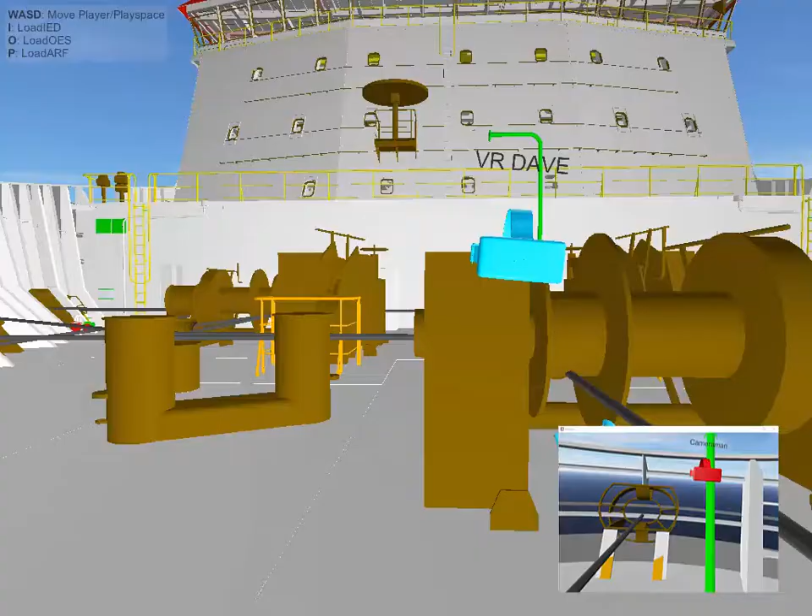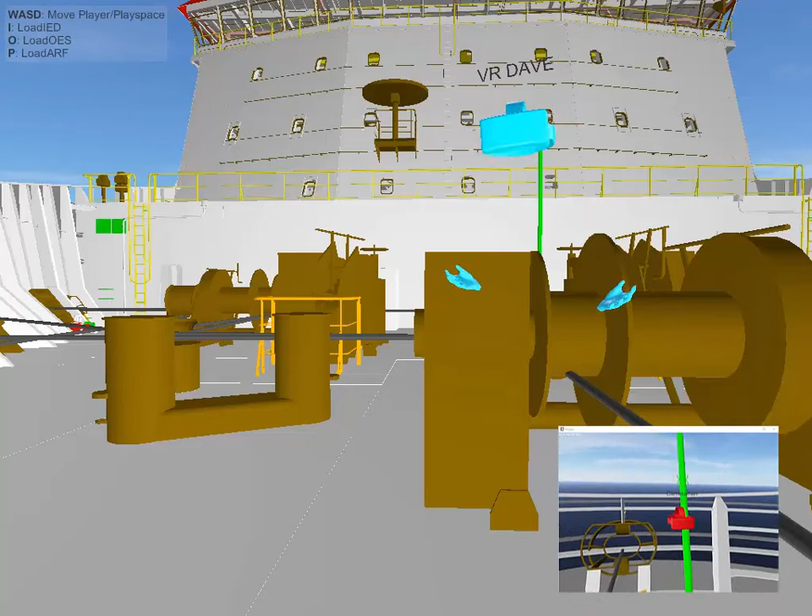In the next few minutes, I'd like to give a short demonstration of our VR application. So, as you can see, I'm here on the Marine Training Project. This is the full model, originally from Tribon in AVEVA Marine, and now in VR. So for the first time, I'm able to be on this amazing vessel and have a look at it like I've never been able to do before.

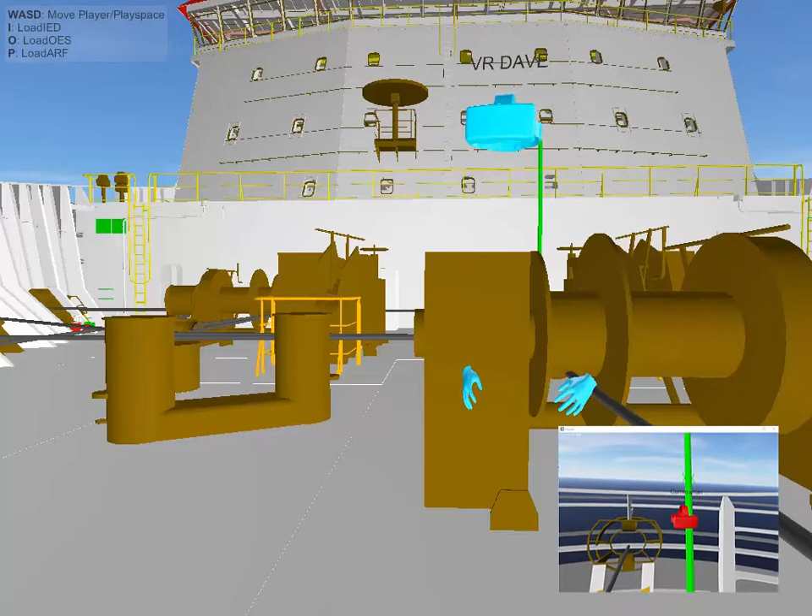I have a cameraman over there, which you'll be able to see in other parts of the video. So, hi, cameraman. And the cameraman's going to follow me so you can see what it's like for me to be in VR in this demonstration app.

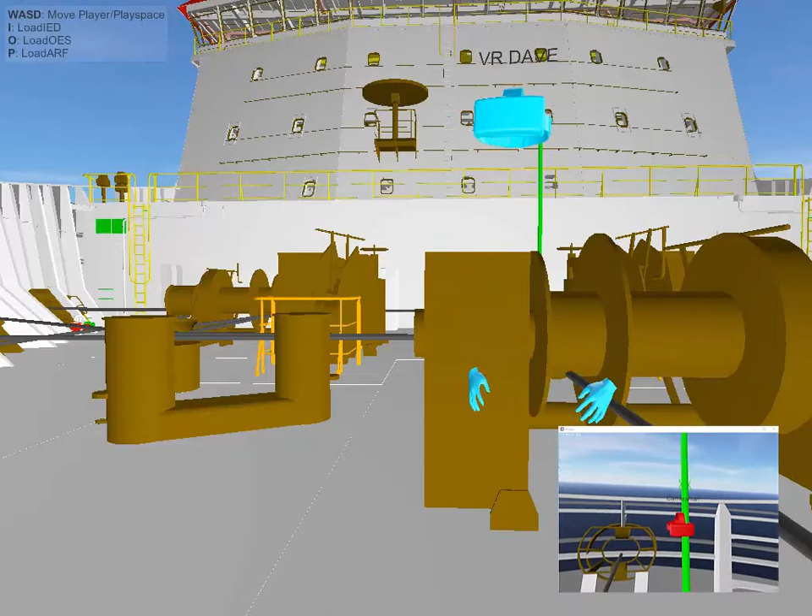So the first thing is this amazing model here. It's about a 100 million polygon model, now rendering at 90 frames per second in VR. And we've built this application using Unity, the very well-known game engine. So I'm in here in VR. I can come in here with other users. It's a multiplayer application. So the cameraman just now is another user, which I'm controlling from the other stick.

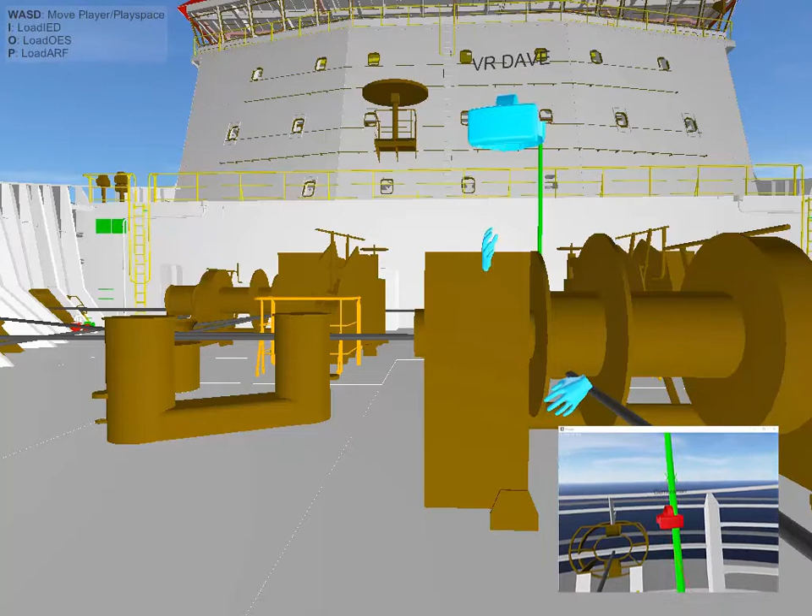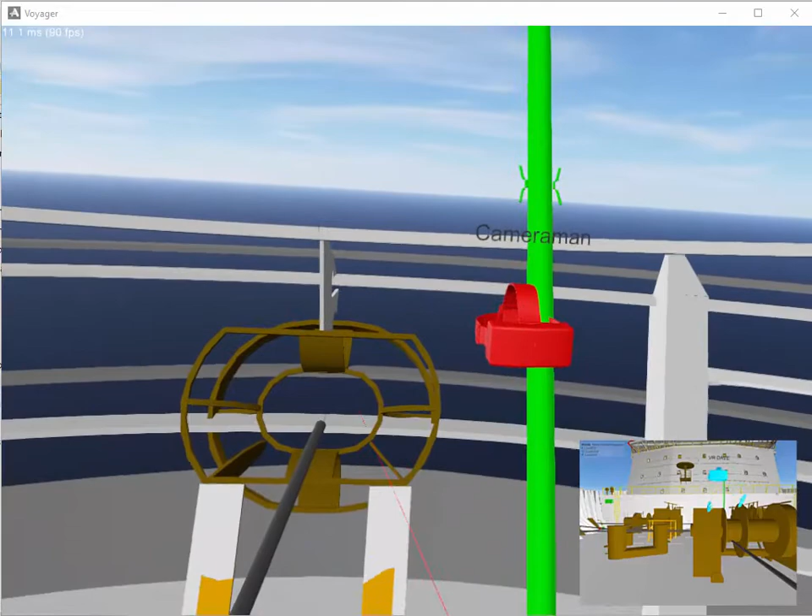So you're looking at the cameraman's view. Let's now have a look at my view in VR. So I see the cameraman here as a headset. I see my touch controllers. I'm using an Oculus, but I can use an HTC Vive. And I can turn around physically, or I can use the buttons to turn around and have a look around at the model.

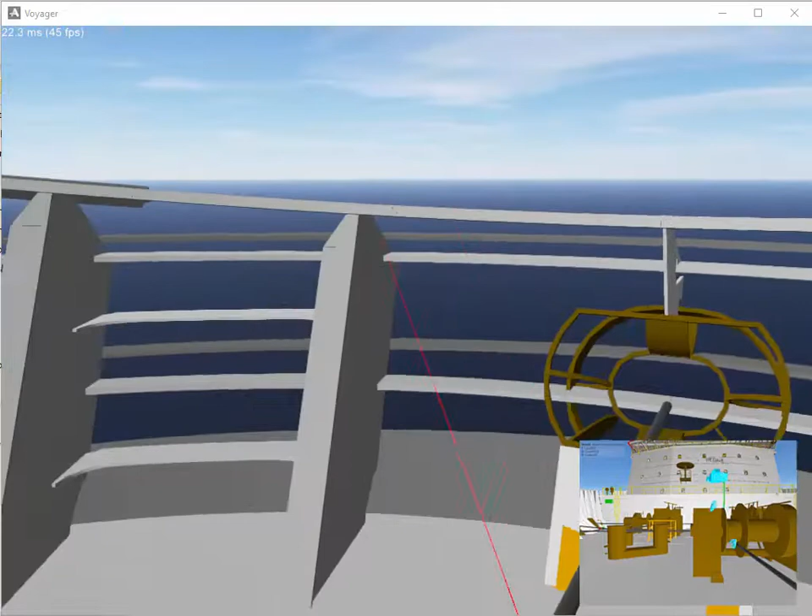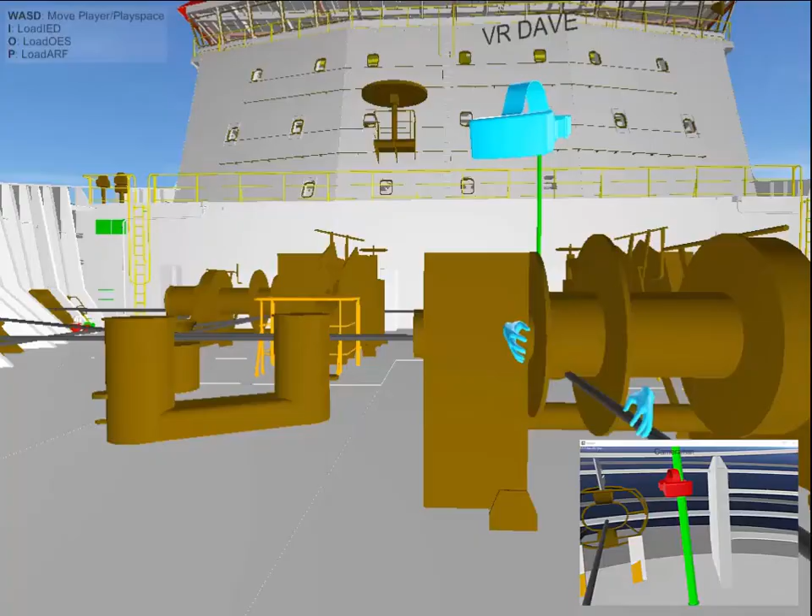I have some basic functionality here. So switching to my view, I have a power wheel here on the left hand side. So I can teleport, and then with the trigger flashing there, I can point at anywhere on the ground and move myself around in a very comfortable way without any motion sickness, and always having the head height relative to the floor, which is very important for comfort.

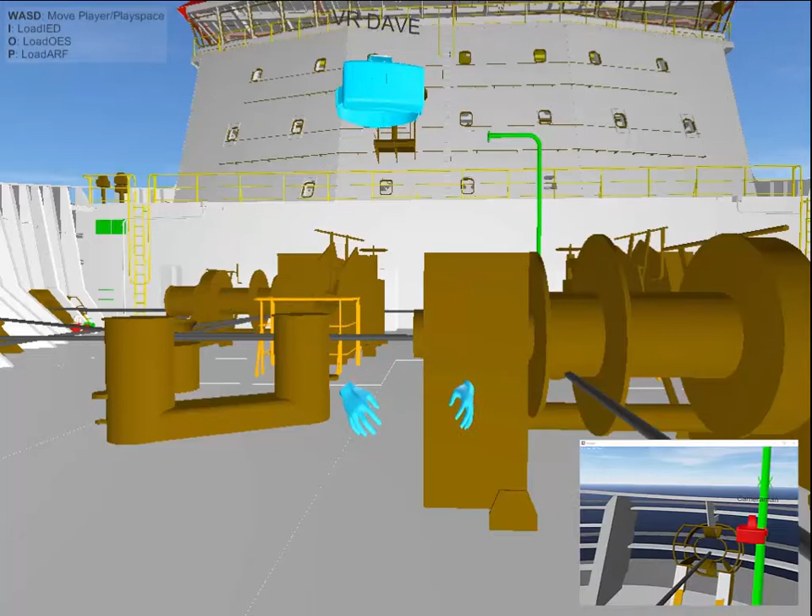So I can move around the model like this, as you can see. I can jump over things like this, and you should be able to see me from that cameraman view over there quite well. I also have a fly mode. This is something that we typically leave just to the young guys, but it means I can fly anywhere in this model, anywhere I look, so into the ground, inside this winch box, however I want. But the normal and most comfortable way to move around is with the teleport mode.

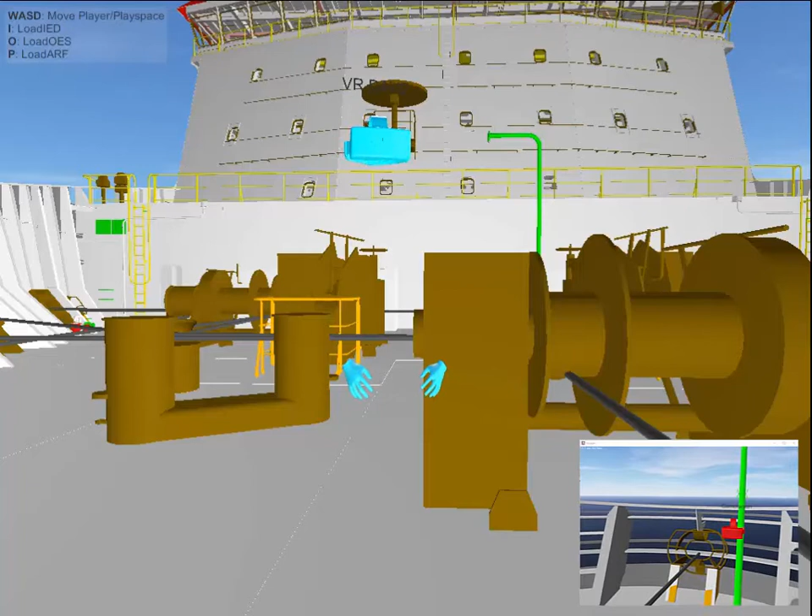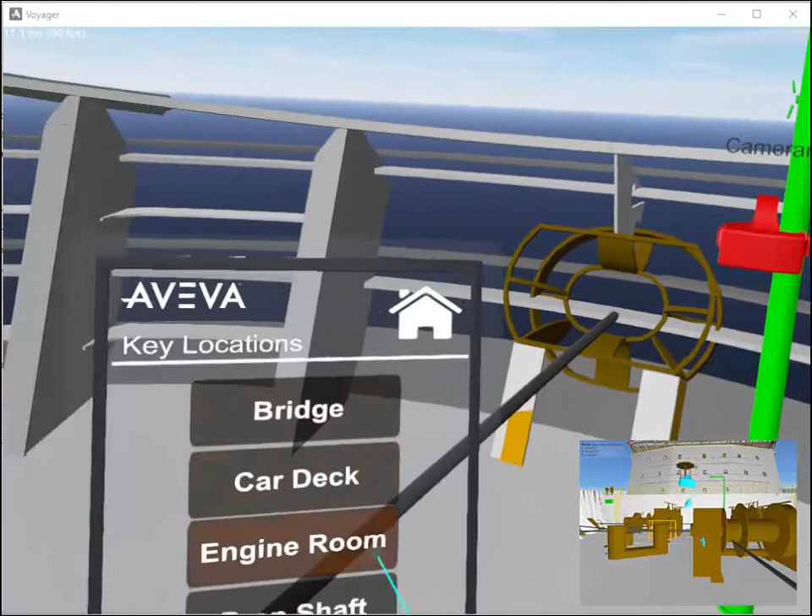Okay, switching over to first person view. I have a user interface here that gives me key locations. So we have the bridge, the car deck, engine room, prop shaft, foredeck, all these various places here, which allows me to fast travel to different locations.

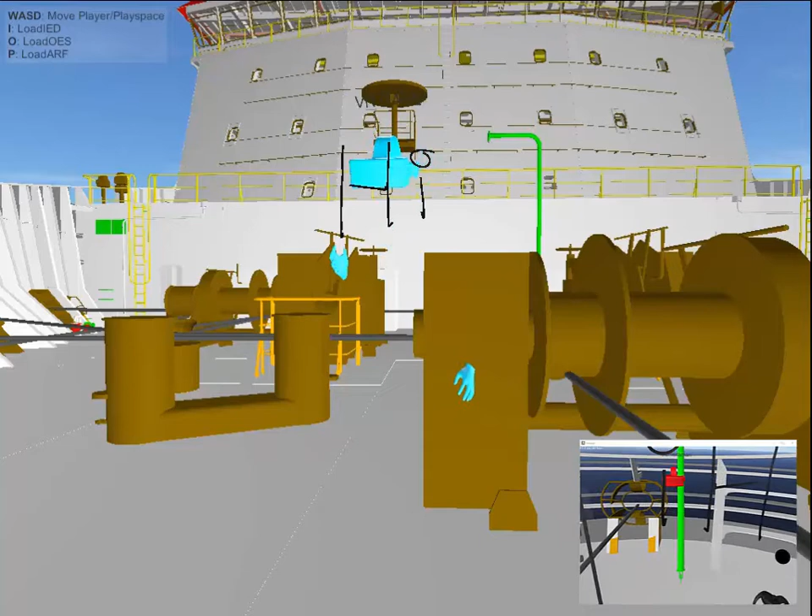And I have here markup functionality, so I can pick here a line color. So let's say a nice light blue, and then I can write something for you here in space. So hi everybody. I can create this geometry wherever I want.

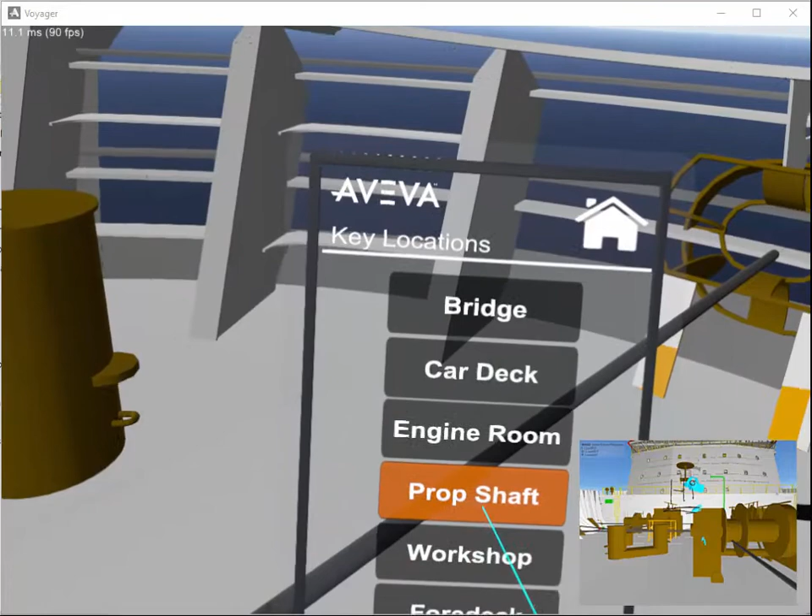So I'm going to show you some other features, but we're going to jump to another part of the vessel for that. So first of all, I'll use my tablet interface here. I'll go to key locations, and then I'm going to go into the prop shaft. Okay, here I am in the shaft room, or the space down the center line of this vessel. As you can just about see, the shaft goes all the way through the vessel. It's a very confined space.

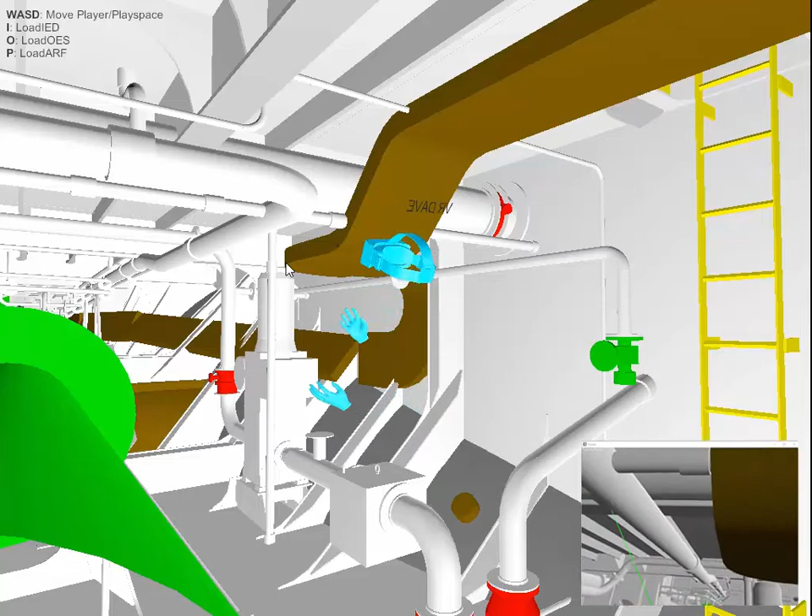And in VR, it's very good here to use this technology to see if I can reach out and touch pipes, if they're going to hit my head and these kind of things. Or I can use it very easily to find clashes. So you can see there's a clash, pretty obvious clash there. It's very useful to move around these spaces just to get a good sense of the feeling, whether I can touch things, get a good feel for the space that I'm in here.

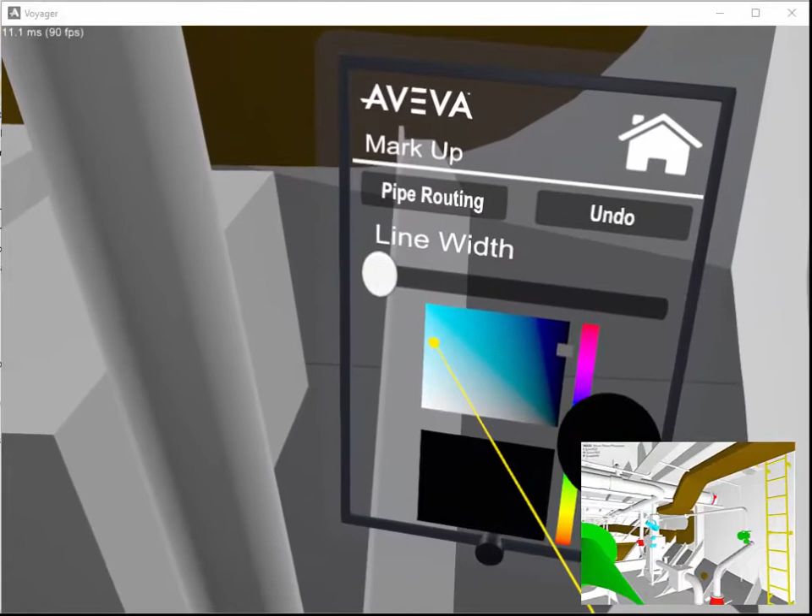So we developed a little bit more functionality here, which I'd like to show you by moving in between these pipes. And I'm going to go back to my drafting mode again. So hopefully you can see me from over there, picking here a color with my paintbrush, and then I'm going to increase the thickness of that so it's roughly representing this pipe here. I'm now going to draw a line, and I'm going to use this very simple pipe routing tool to draw a pipe in this case.

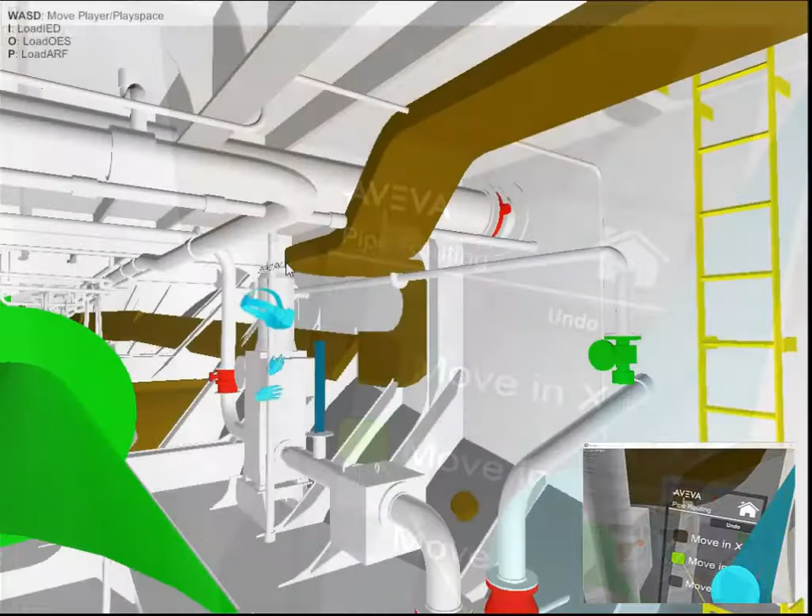So along this axis, and then I'm going to move myself over here until it connects to that, and then finally go in the Z location up to join up with this pipe. So hopefully you'll be able to see that I've drawn essentially a sketch of a pipe in this space here where there's a pipe missing. And this is of course very useful.

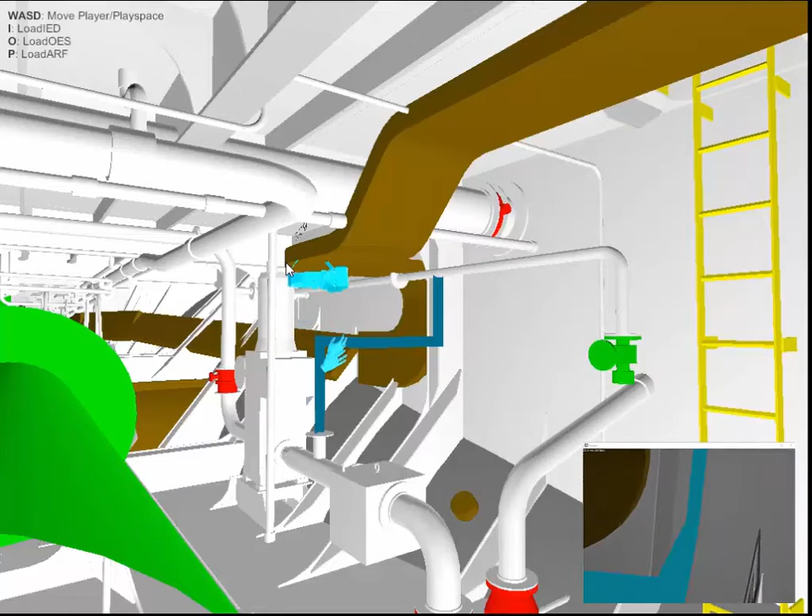If you move to my VR mode now, you'll be able to see that I can move around this in a very natural way and see that this is not going to clash with anything by grabbing it and literally sticking my head behind it. So that's something like a preview of the future, you could say, where we're going to do some pipe modeling in the VR space. And this is a simple sketching capability that we've created.

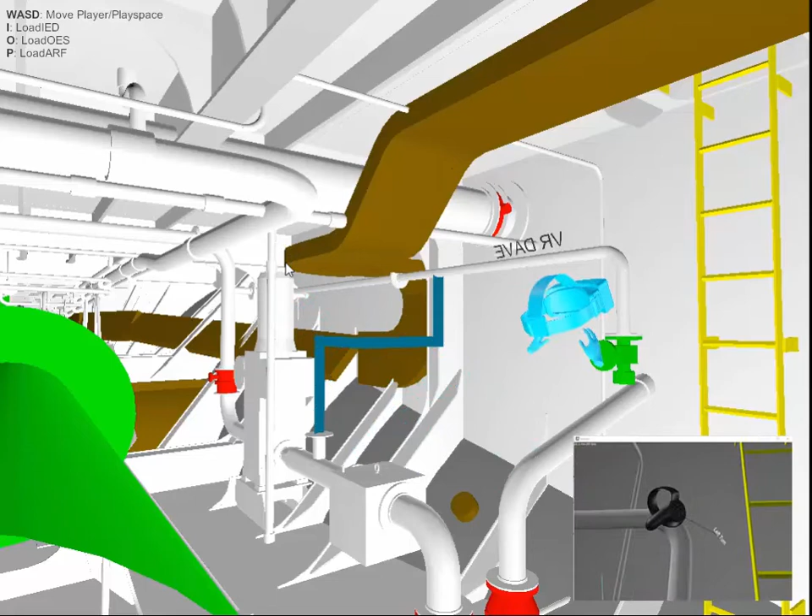One of the other things that you might have noticed is that I'm actually using my hands to pull myself around the model here. So this was originally created to climb up and down ladders like this, but it's a very good way to look at very specific things in the model. So if I want to have a look up here, I can simply move the model around me and have a good look at this valve above and below it. And that's using what we call the climb mode.

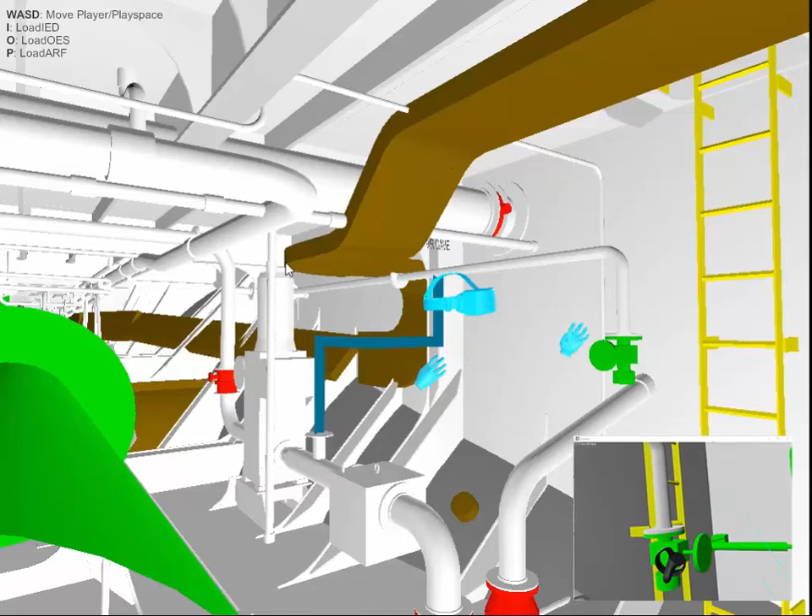I can reach out, grab this valve, have a look at it underneath without having to bend down and look underneath it, which of course is more realistic but not very useful in a design review situation.